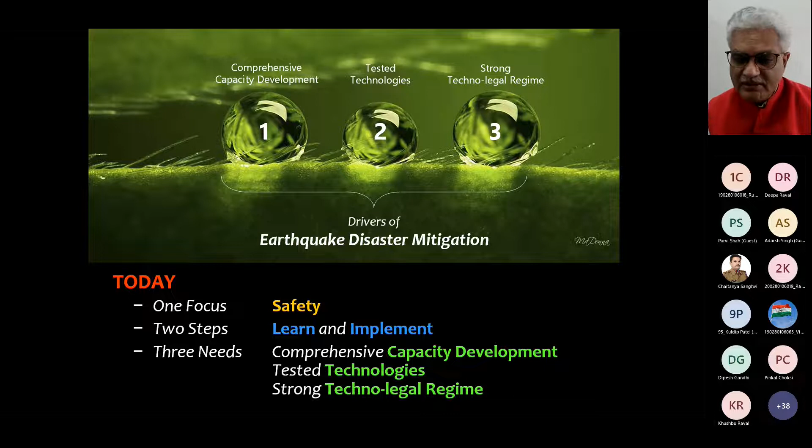And the most important activity as we look at it today is that of 10,000 municipalities, none of them are checking the safety of the structure when a design document is submitted to the municipal corporation. So on 3 counts, where we are using untested technologies, where the designs are not being examined by municipalities, and where engineers are not competent enough to handle the subject of earthquake engineering, we are looking at a backdrop of R&D, which is the basis of creating evidence-based implementation of earthquake resistant design practices.

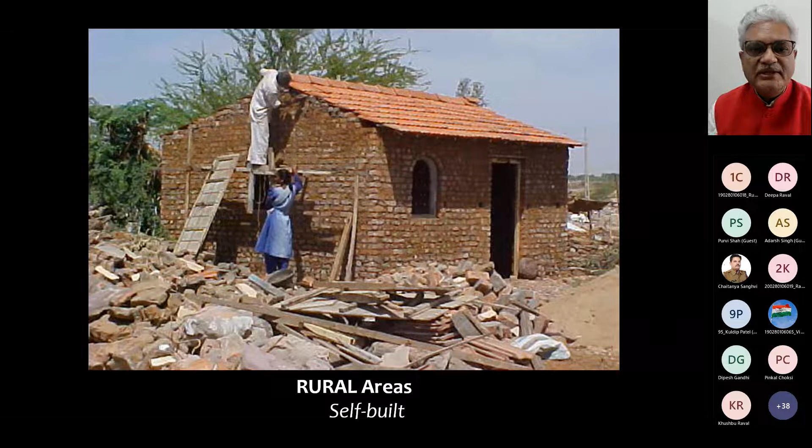We are looking at Gujarat's 2001 earthquake, where buildings collapsed and they're rebuilding again, this time also without earthquake resistant features. Like this, there are a large number of buildings that are cracked and standing across the country, which need urgent help for retrofit. We are looking at a good number of structures that are hybrid structures made of different materials, be it brick and reinforced concrete, or brick and wood, or stone and wood, and so on. So we need a formal program to study all these technologies. We also need to worry about the so-called engineered structures as well as the non-engineered structures. And there's much more gain or development we can achieve quickly if we can sort out the non-engineered construction.

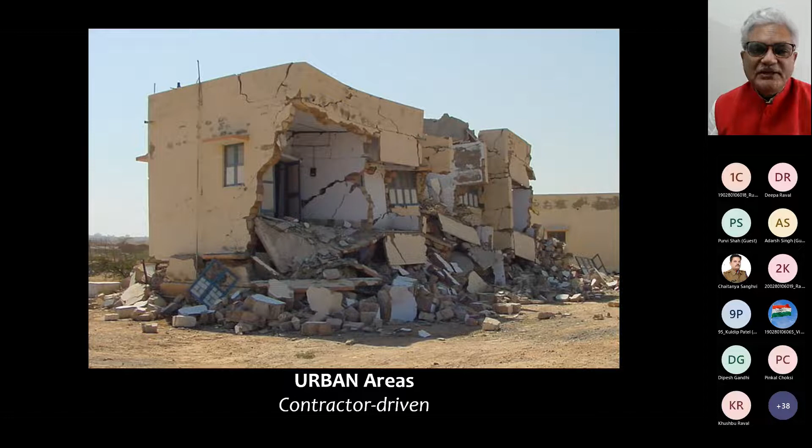So-called contractor-driven construction is making mistakes, which is becoming very obvious in the aftermath of earthquakes. So the type designs are a big crisis for us. It is easy for a government or a contractor to take a type design and reproduce 50,000 of them, or 10 lakhs of them, or 8,000 of them. But if there is a mistake in that, if that technology is not verified adequately, we will be embarrassed as we have been in the past.

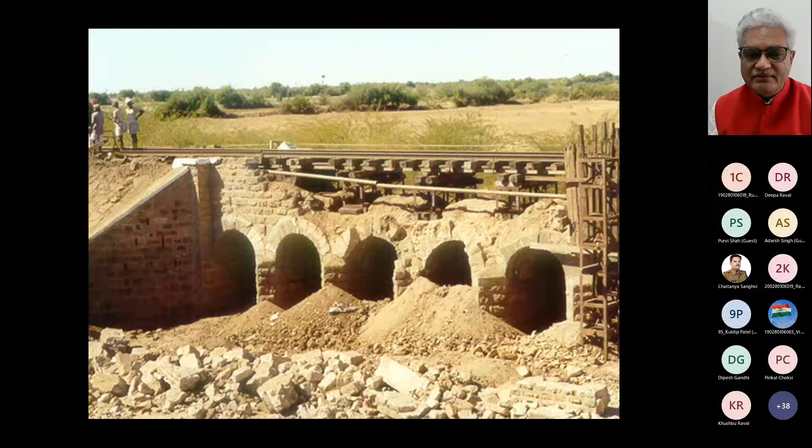If engineered buildings collapse at moderate shaking, we are in a position to say that we have not done enough to protect our own selves. Look at the spectrum of structures, bridges. Over 3 lakh bridges are sitting across the country, which are made of masonry structures, and they need urgent help. Large number of buildings and structures already built, but without earthquake resilient features are potential dangers for us in the next big earthquake that is likely to happen.

If one thought earthquake engineering was a civil engineering activity, even that is not true. And so virtually all engineers have to worry about earthquake shaking, be it electronics engineers, electrical engineers, mechanical engineers, and metallurgists, material science people. Everybody should now find agenda, and there is enough work for each of them to get worried about the next big earthquake.

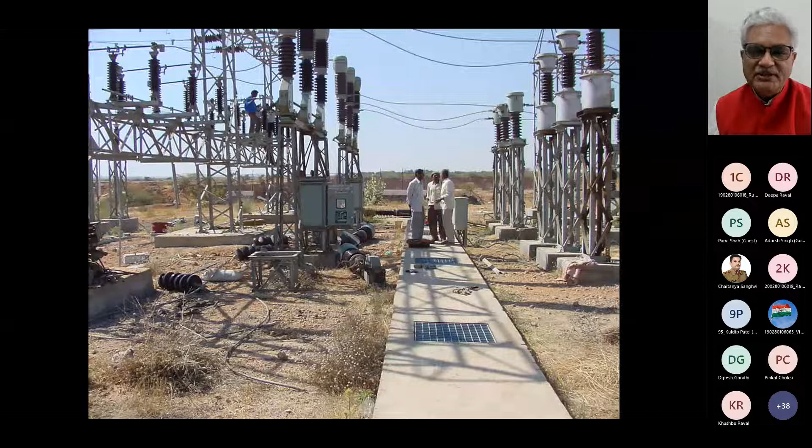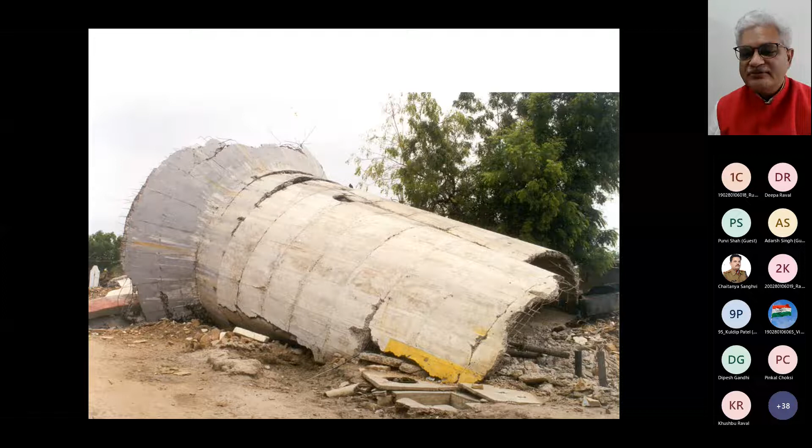Community structures have not received enough attention, especially water tanks. And we need to make sure that we don't have this practice of making cheap structures, but we develop a practice of making safe structures. Coastal structures, we don't have any standard for design of coastal structures to resist earthquakes. This is a double jeopardy problem because as such they are in water and there is clay and piles. In addition, if you add a shaking to that, then you're looking at possible liquefaction also to occur, even though it is in clay. There is a need to examine that.

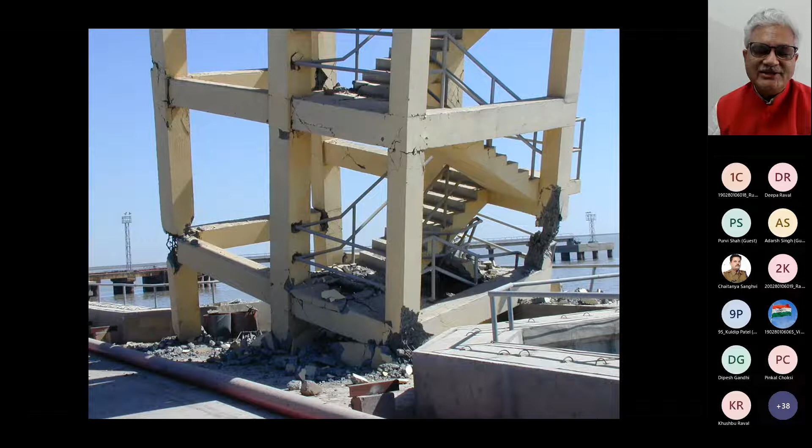Industrial structures come with their own complexities, and enough study is not being done to say that the designs that we are providing today are good for lateral actions. They may be good for vertical load carrying capacities, but not necessarily for lateral actions. It should become a practice in the nation that when you have irregular structures, the new engineers who are coming in from the colleges should be prohibited from designing such structures because the nuances are one too many and the complications are such that even an experienced engineer needs to spend significant amount of time, effort, and consultation before approving the design of such structures.

So in effect, how do we go about doing this entire work? When I look at disaster management per se, there are events, 3 of them before the disaster strikes and 3 of them after the disaster strikes. The most important, where we will get the maximum gains for the same effort, will be when we address the matters of mitigation and preparedness. Those of us who understand the 6 pillars, it's fine. For the rest of you, mitigation means building the hard structures to stand there without collapsing. So this is about the built environment. And preparedness is about the people, getting them ready to behave in a correct way when there is earthquake shaking.

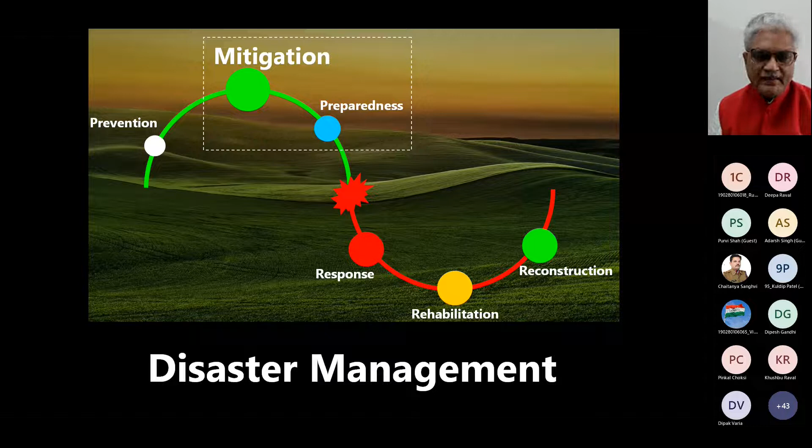You would agree that if we build all the structures to be safe from earthquake shaking, then you don't need response, you don't need rehabilitation and reconstruction. Post-earthquake response, you don't need. But if you don't do anything before the earthquake, which is mitigation and preparedness, then we will continue to have losses of lives and significant setback in property losses, and the nation will be pushed back, the states will be pushed back 30, 40 years every time there's an earthquake. This is something that we need to introspect deeply on.

So what is the method of going from where we are today to where we need to go, the target for us? There are two options. One is we're looking for ladders and we want to go up quickly. You want to do large work in half an hour and then reach there. The other one is go along the dangerous path for some time and then you'll soon see that life will get simpler and then you can walk ahead on a safe trajectory.

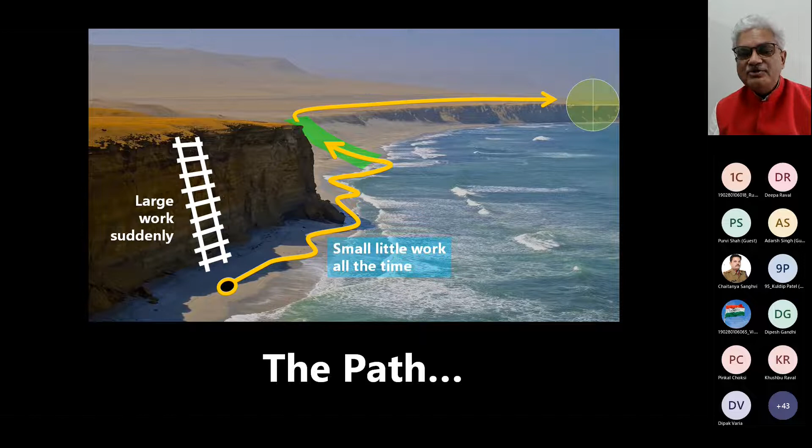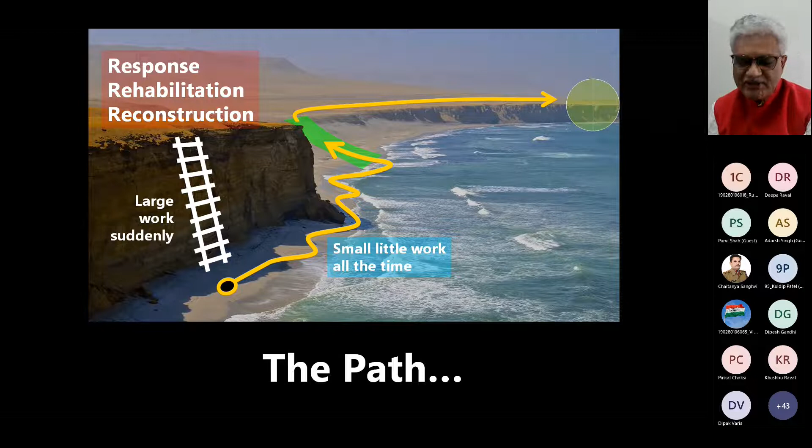So we need to do small little work every day, all the time. The first approach is the post-earthquake approach, which is response, rehabilitation, and reconstruction. And the second approach is mitigation and preparedness approach. Once mitigation is in place, preparedness has meaning. But if mitigation is not there, just doing preparedness will actually bring not much gains to the nation.

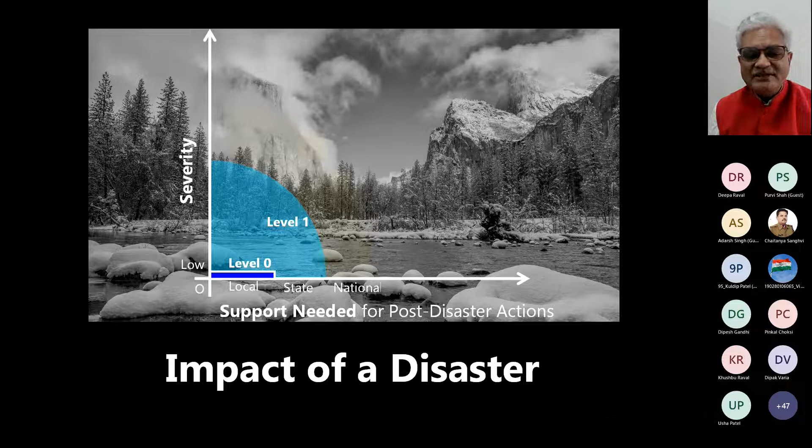When you look at disasters, there are small events which are local, can be handled without much pressure on us, but there are events that can spread over a state. Then there are events that spread over a nation, and then there are events that spread across the boundaries of the international borders. And hence, we need to see where is the potential source of earthquakes for us. Are we going to be incapacitated inside in a local town alone or in a state, nation, or international?

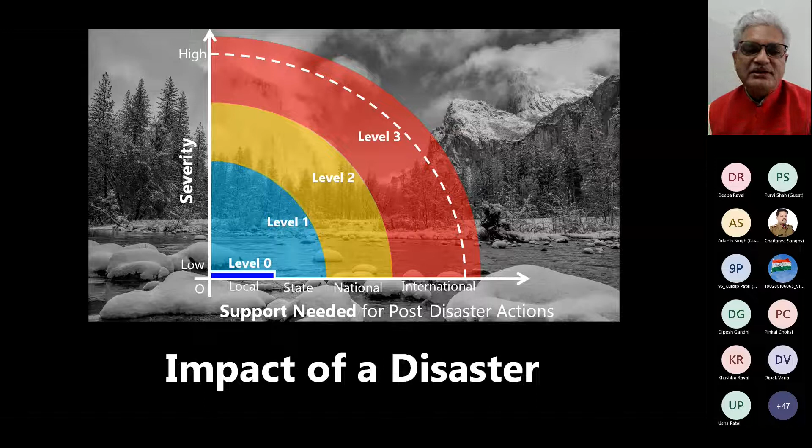It so happens that unlike other disasters, earthquakes do not happen in towns and cities. They happen in regions, and hence it can be within a state or across states or within a nation or even across international borders, as we have seen in the past earthquakes in India. So we need to prepare ourselves not for the small event alone, but for the largest event that is likely to happen in the country and bring together people of that region to become that much more capable. So we need a graded capability across the country to resist the issues of earthquake resistance.

So there are three things, three sets of activities or focus areas for us. First focus area is people, second focus area is property, and third focus area is performance. If your people know what to do, they can build the structures correctly, and if they design and build the structures correctly, they will perform correctly during the earthquakes. Now this is where the catch is, that even though we know the sequence 1, 2, 3, it is interesting that unless you bring all the people together, academia, industry, and government, and ensure that the property is protected, the rest of it is not going to bring us gains.

So once the property is protected, you will realize that it is possible that we can improve the understanding of the people, and we can also improve the performance of the structures in the next earthquake. And this loop is possible only when an organized R&D program is organized in the country, which brings together this tripod of academia, industry, and government to take responsibility of facing the next earthquake without any human losses.

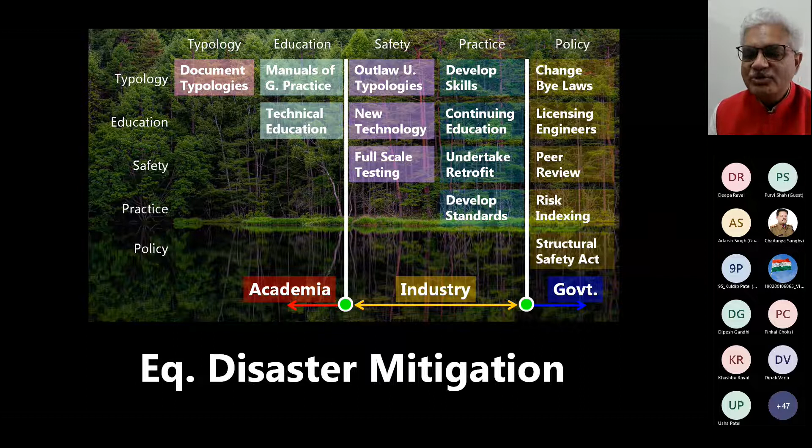So in every one of these boxes, there is a need for all the three to come together, academia, industry, and government, even though there is primary responsibility assigned to each of them. Only then we can say that we will have a competent nation capable of undertaking earthquake disaster mitigation.

Right? Now you might ask, in this picture, where is R&D? R&D is in every one of these boxes. It is not that R&D is a separate holy cow, which we will have to address independently. But if you're looking at technical education, unless the teacher knows 100, he or she cannot teach 10.

Unless the rigorous analyses are done and the unsafe typologies are demonstrated, we cannot remove the unsafe typologies from practice just by word of mouth. We have to demonstrate their poor performance, and we just can't wait for the next earthquake. If we have it from the previous earthquake, it is wonderful. If not, we have to do detailed experimental as well as analytical work to show that we need to remove those unsafe typologies.

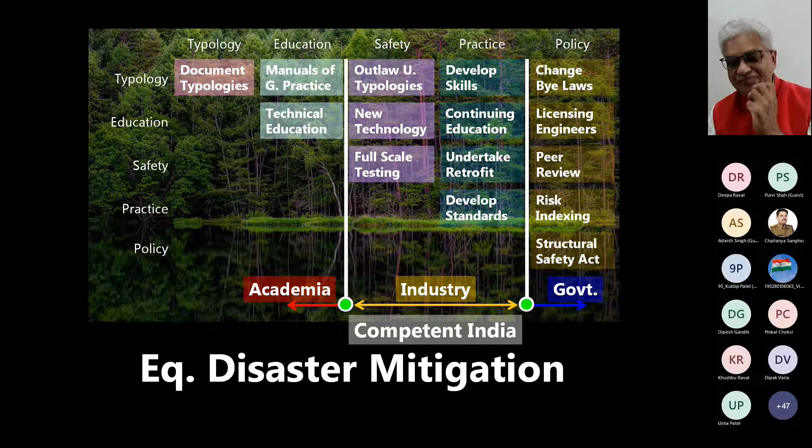Very clearly, so what is the roadmap for built environment? R&D tells us that first of all, the construction should be minimal. If you don't want something, don't use that, don't make that. So don't make unduly large buildings and tall buildings and wide buildings with a large number of fixtures, with heavy masses and so on. So you need to use minimal resources and make a structure.

First. Second, you need to use natural materials to the extent possible to make a structure. Third, you need to understand disaster resistance and build those disaster resilient features in the constructions. And fourth, you have to respect nature. The solution is not always to defy nature; very clearly in some cases you need to comply with nature. And this is where the displacement design and the force design come into picture.

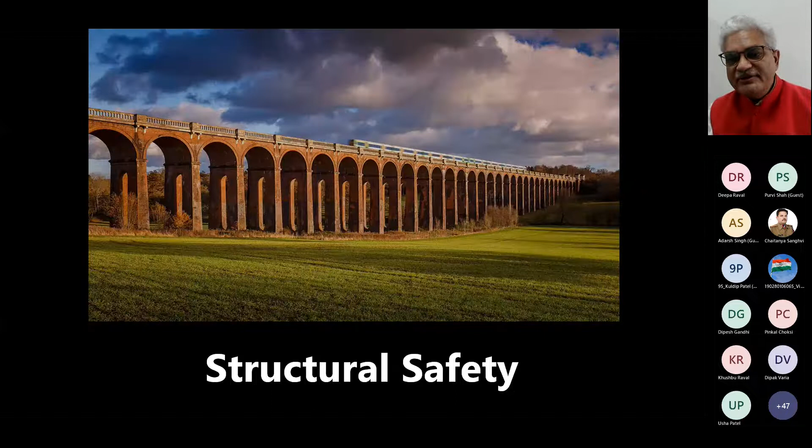Structural safety, on the other hand, if you look at it, has 5 major expectations: safety, serviceability, durability, aesthetics, and economy. These are the 5 tenets of every built environment. And out of these, in the driving seat should be safety. On the top of the list should be safety. Once safety is in place, then we will assess serviceability, durability, aesthetics, and economy.

Furthermore, the first 3 are fixed in that order. First of all, it has to be safe. Second, it has to serve the needs, the functionalities that we have. And third, it has to be durable. Only when it is serviceable can we talk of durability. Otherwise, we do not talk of durability without it being serviceable.

Also, the last 2 items, aesthetics and economy, are something that we will have to keep in mind. Every engineering solution should be an economic solution. So unduly increasing cost of structures just because we get a percentage of it is not the method of life for any designer who is building these structures, right?

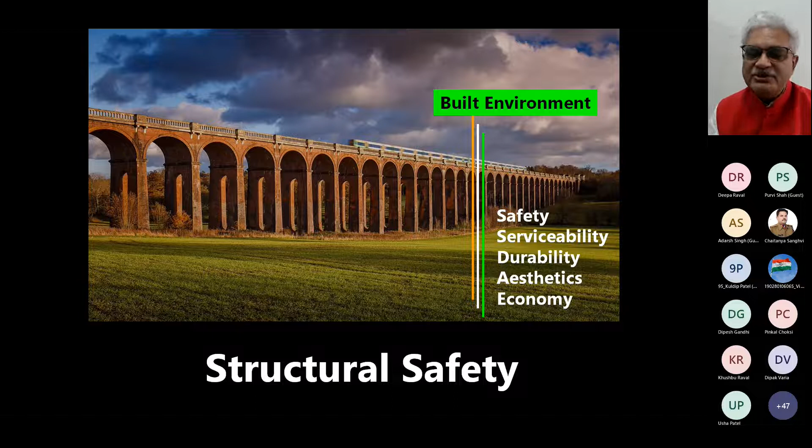Aesthetics: if you want to make the building more aesthetic, you may have to spend a little more money. Or if you don't have that much money, you can push aesthetics down and bring economy up on the priority list. Otherwise, the first 3 positions are fixed and we need to comply with that.

Wisdom tells us that on earthquake disaster mitigation in the R&D side, we have made many mistakes and we don't want to make those mistakes now. So what are the mistakes that we made in the past? First of all, we don't have trained manpower. So the first requirement of R&D is that we have trained manpower.

Qualified manpower is not sufficient. We need competent manpower. Competence is knowledge plus skill plus positive attitude. Only then we call that as competent person. And so we need competent manpower.

Second, we are undertaking land use indiscriminately. For example, if there are low-lying areas, we go ahead and construct structures in that. And when earthquake comes, because of the water table being very high in those low-lying areas, liquefaction happens and the structures get into trouble. Or if you're on the hill slopes, which are unstable hill slopes, rolling debris will come and hit the buildings. And then we are saying, no, this is unsafe.

So we need to worry about land use the way we have been using land. And sometimes in hilly areas, we are overloading the slopes, and settlements are now becoming very obvious in 60 years' time that it was not a good practice to overload the slopes.

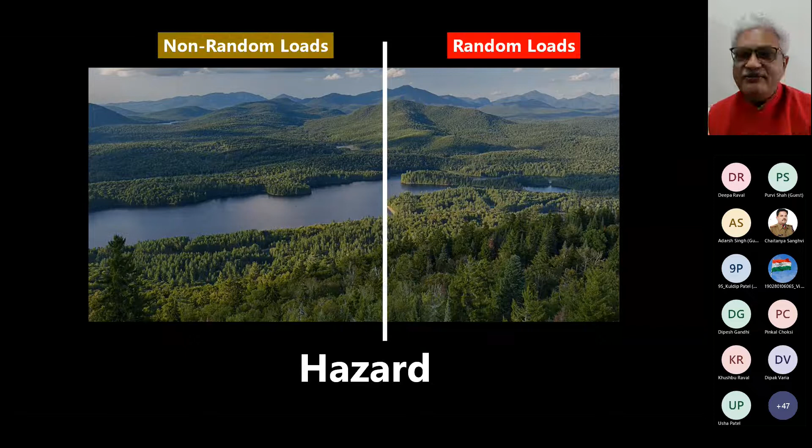Talking about hazard, as I mentioned before, we have looked at all our 16 load actions that we have. And when you classify them, you have the non-random loads and the random loads classified into force loads and displacement loads. The force loads are relatively well understood, but the displacement loads, which are earthquake loading as well as foundation settlement, elastic shortening, temperature, creep and shrinkage, are not well understood. They are not taught in the classes also. And this is where the worry is, that we send out people with force load design capabilities and they have to implement displacement loading design at the practice level.

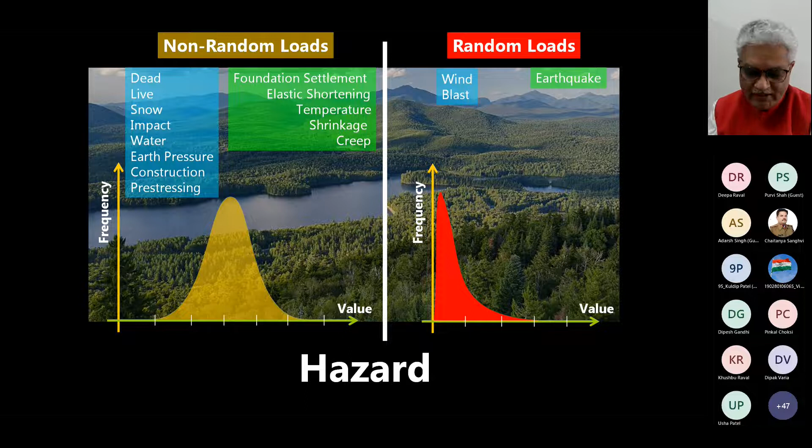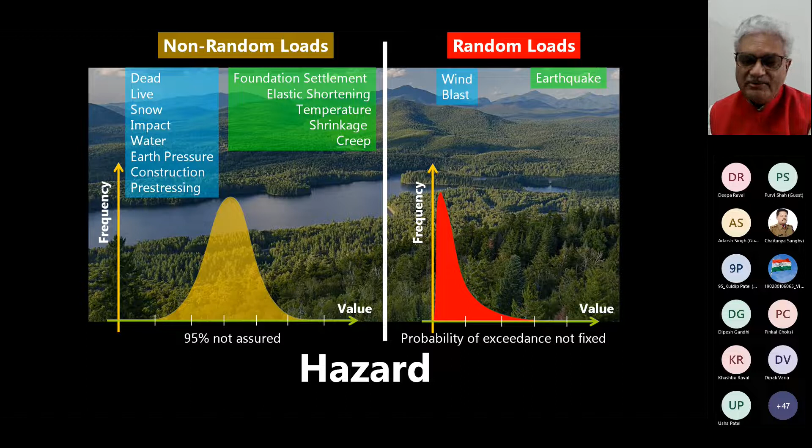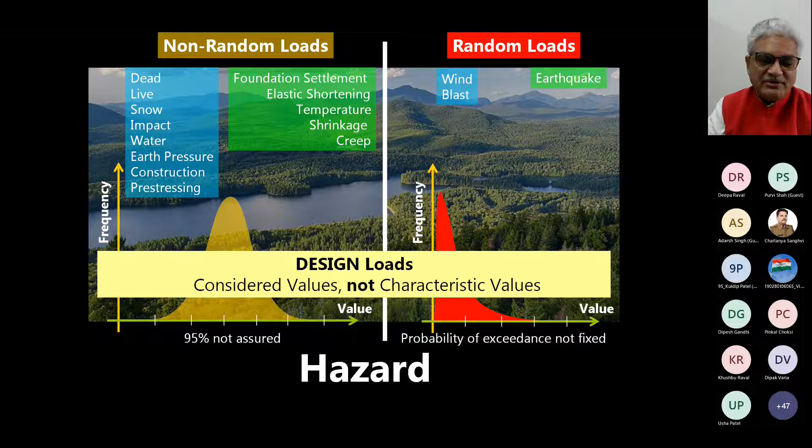Another important point is that when you look at force loads, there is a sense of characteristic load where in 95% of the cases, the load is less than that characteristic value. And that's not the story in the case of earthquakes. They are relatively infrequent activities. So we need to play around with the probabilities of exceedance. So unlike in the case of the commonly known loads, where the design loads are characteristic values, in case of earthquakes, the design loads are not characteristic values, they are considered values, which means that it is becoming subjective here.

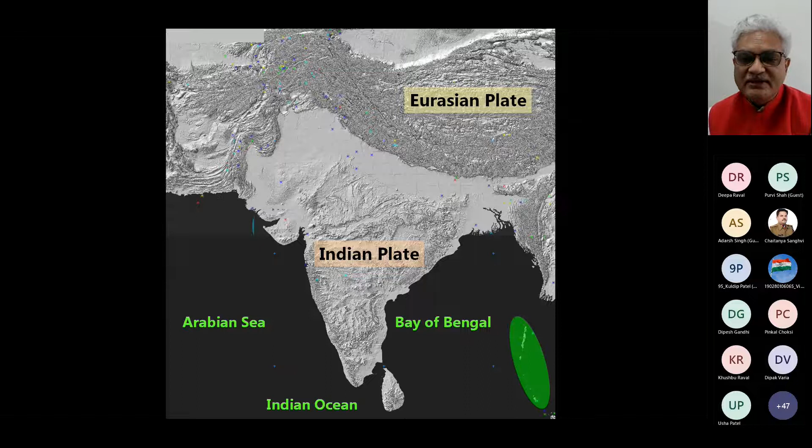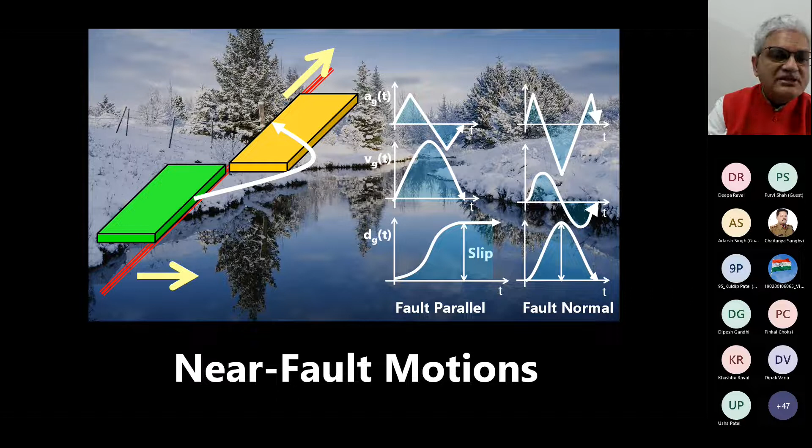When you look at the Indian subcontinent carefully, you will notice that there is a very special situation that we are faced with, which is the Himalayas. The faults are along the Himalayas, and there is a near field action that is causing the faults to provide large velocities and large displacements in the ground motion, which are residual displacements. And this is not reflected in the current design practice in the country. So there is a need for understanding fault normal and fault parallel motions, which will eventually tell us what will be the design approach to face large movements in the proximity of faults in the country.

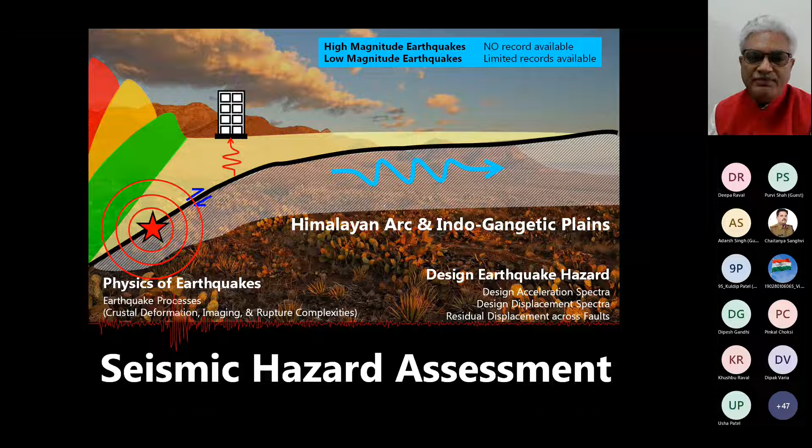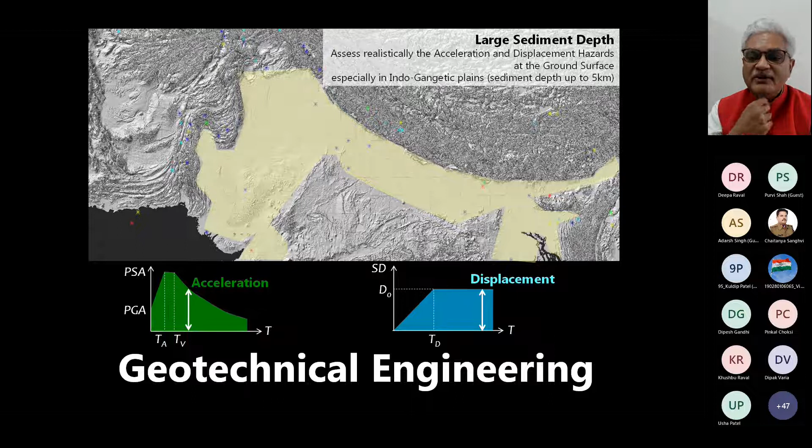Seismic hazard assessment has yet another dimension for India, which is peculiar to this nation and not to other nations. When you look at the northern region here, we have the Indo-Gangetic Plains, which is largely the ocean bottom sand that has come up due to the plate collision. When the Indian plate collided with Eurasia, that is the ocean bottom material that has come up. And this ocean bottom material changes the response of the ground depending on where exactly you are located with respect to the fault lines.

There are deeper sections near Gorakhpur, which will be about 5-6 kilometers thick. And there'll be sections near Lucknow, which will be about 4 kilometers thick. And then there are places in between like Kanpur and eventually Jabalpur, where you're looking at the sediment thickness varying from 5 kilometers to 0 kilometers. Different structures respond to different natural frequencies in a different way.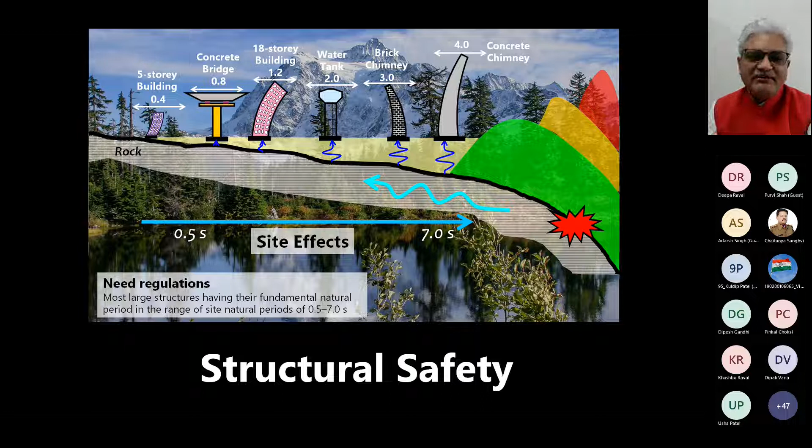And hence, we are looking at understanding the site period carefully so that such structures whose natural periods come close to the site periods need to be designed in a different way altogether. And so we need regulations here, but for those regulations, we need to have enough R&D undertaken so that it will go forward safely from where we stand today.

The concept of multi-hazard has been in use all these days. I must say that just as in design, when you design a structure, you first design it for strength and then check for serviceability and robustness and integrity. In the same way, you need to look at your primary hazard that is prevalent at a site. Let us say there is a location where earthquake is the primary hazard in the country. Then you need to design for dead load, live load, and earthquake to begin with, and then check for all the other hazards and all the other levels of performance that you're expecting.

So it is not that this is something new that we are doing today. This has been in practice all these years. It is just that somebody managed to put an exciting word into the government's eyes and they called it multi-hazard. Every design is actually supposed to be multi-hazard. There is no design that is not multi-hazard. And so we have to be very careful with buzzwords that are going around in the market. Don't fall prey to this multi-hazard story because this is not a new story. We have been doing this all along.

Disaster resistant design, as I said, when you look at multiple hazards, there is defiant design if you look at force loading, and there is compliant design if you are looking at displacement loading. And this is where we stand today, that always larger sizes, thicker members, bigger structures are not going to win you safety, because larger structures, bigger sizes, thicker members will give you more mass, and that will mean more earthquake forces, which means there is a need for higher earthquake resistance. And especially if your material is weak like masonry, they will not survive.

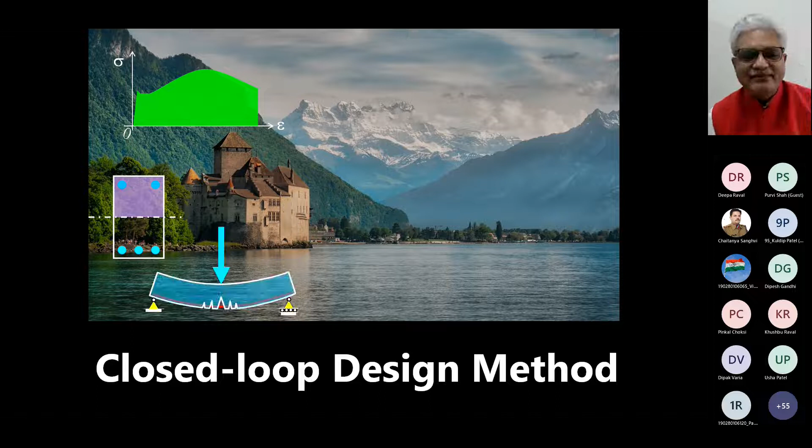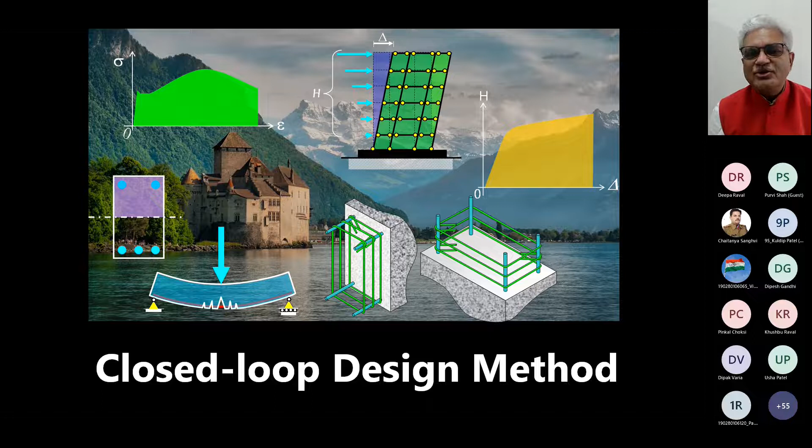So this is the first time that you will realize that if you know the materials and you design the sections and then detail the members and go ahead and construct, it is not sufficient. You need to also understand the behavior of the structure that you have designed, and only then you should sign on the drawings. So just the forward loop is not sufficient. You need to close the loop and make sure you always follow a closed loop design method.

Currently, Indian practice is not doing the closed loop design method, and we need to go towards a closed loop design method, which means a good amount of R&D needs to be done by the technical people of India, by a large number of competent technical people of India, a graded population of all ages. That is what I'm looking at. When I say graded, I need people who are young, who are middle-aged, and who are old-aged. All ages, we need R&D as a sensibility, R&D as an excitement, R&D as a responsibility to make ourselves safe from the next earthquake.

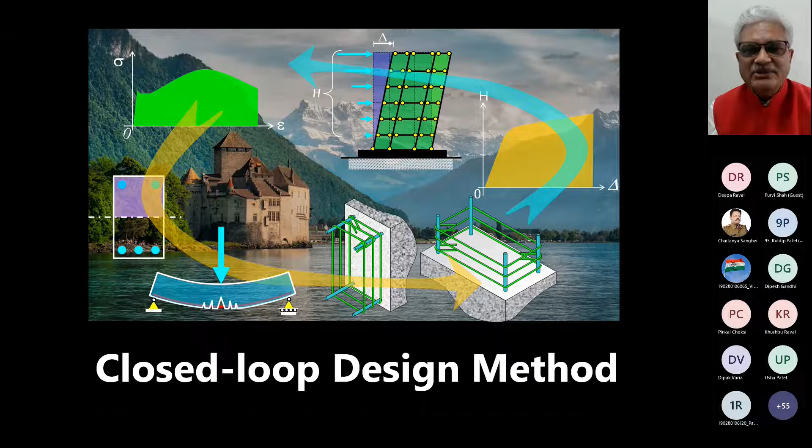So to be wanting to do R&D, you will recognize that R&D can be done on any of the 7 virtues of earthquake-resistant construction. The first one is configuration. You can interact with architects and come up with a detailed structural analysis on the effect of form on safety as far as the architectural practice is concerned. So that's the first one. Second one is how stiff should the structure be in its initial undamaged state. Third is what strengths you should ensure in these structures.

Fourth is what should be the ductility that we can have in these structures? Indeed, what is the ductility that can be achieved in these structures? Fifth is what is the deformability of these structures? How much will they shake back and forth without collapsing? That deformation is important because earthquake is only applying deformation. So ultimately, if your structure has to stand, your deformation capacity has to be more than deformation demand from the earthquakes. And sixth is that there is a collapse mechanism.

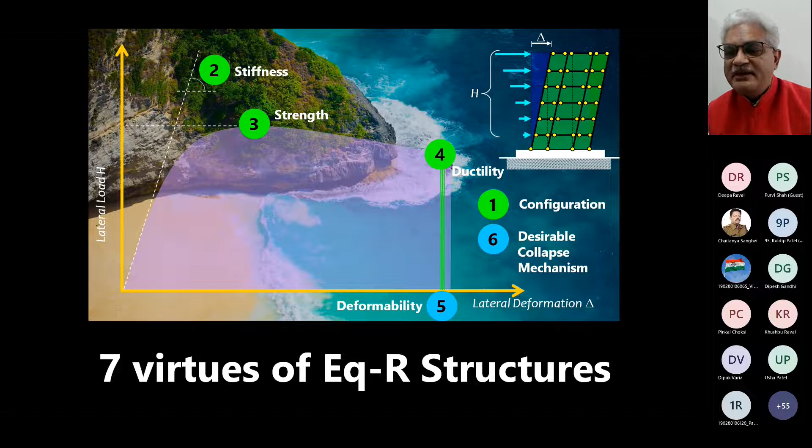The one that you see on the top here is the desirable collapse mechanism, let's say for buildings where only beam ends will form plastic hinges and all the beam ends will form plastic hinges. In the current design practice, all the beams are not forming plastic hinges; only in the bottom third or bottom half the plastic hinges are forming, and the top half is just sitting joblessly doing nothing for the nation. And so we have to make sure that the plastic hinges form throughout the height, and then only we say that we are able to make sure that all the citizens of India are participating in the safety. Like that, all the members of the building are participating in earthquake resistance.

And the 7th item is to see how much energy the earthquake is feeding and how much energy can the structure absorb. So 7 levels of R&D can be done as of today, and we are at the starting blocks. That's the good news as well as the bad news. The bad news is because we haven't done much, but the good news is we can do so much from today.

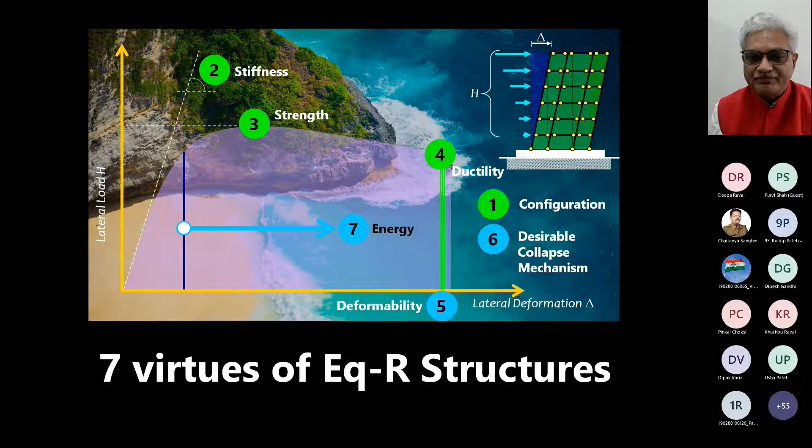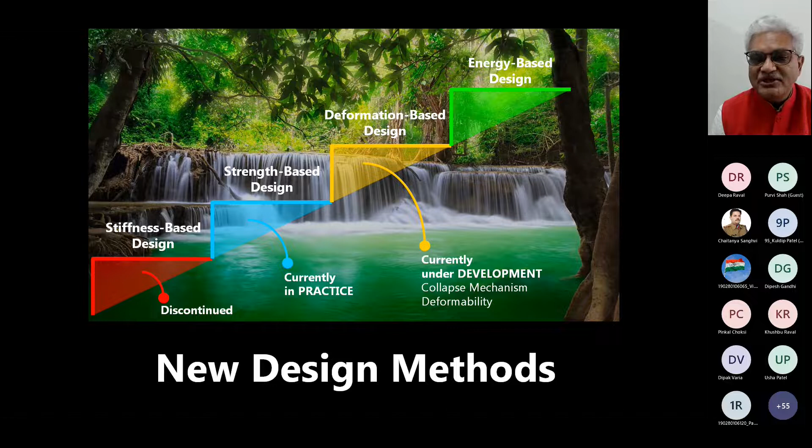So when you look at design methods, if you have seen past design methods, stiffness-based design was what was done in the yesteryears, masonry structures, but that was discontinued, and we got into strength-based design. And that strength-based design is the current practice now, but significant effort is underway on deformation-based design, and this will become eventually the norm for new constructions. And I'm hoping that many of us in India will learn this subject. And eventually, we also have to walk towards energy-based design. Research is just beginning in energy-based design, and we need to focus on collapse mechanisms, deformability, and energy absorption to ensure safety of the people of India.

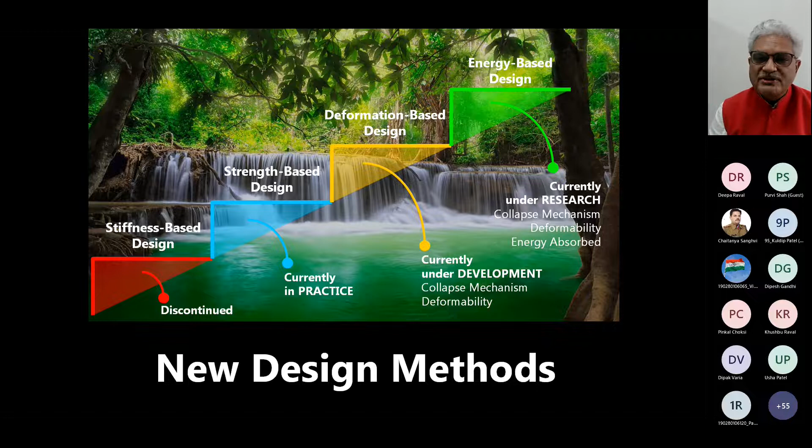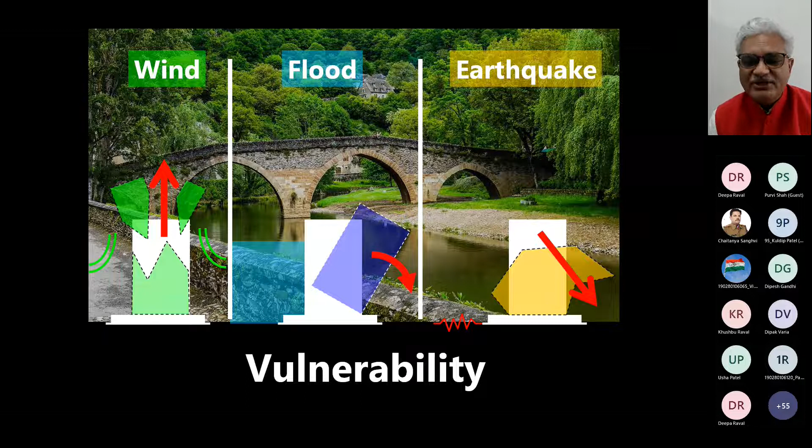When you look at vulnerability of the structures under the three dominant natural effects on structures, you're looking at wind, which generally carries the structure away in the upward direction, right? Everything flies in wind. Under flood action, everything topples, and under earthquake action, everything collapses. And these are the three actions that we'll have to design for. Interestingly, if things are flying away upwards, the recommendation is you should have large mass and good anchorage. Interestingly, for flood, to prevent it from toppling, the recommendation is large mass and a wide base so that it can be restricted from toppling.

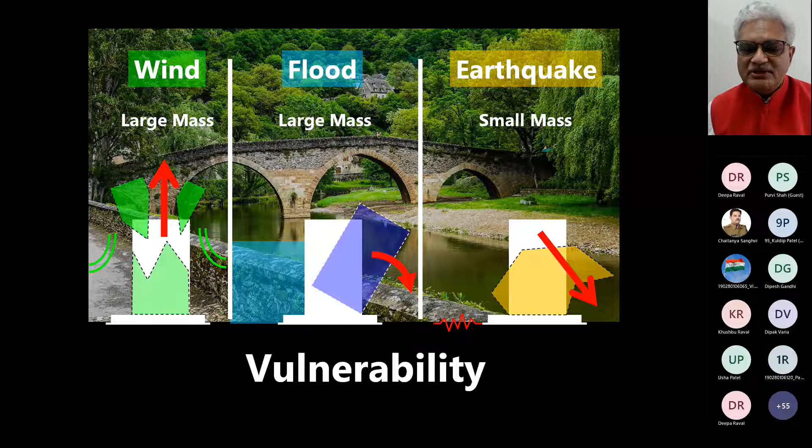And interestingly, earthquake requires small mass, right? So now if you're doing multi-hazard design, tell me what should be the mass of the structure. And this is the subject of R&D. If earthquake says small mass and all other fellows are saying large mass, earthquake is not wrong, neither are the others wrong. Now it is for you to make things right as to what should be the mass of the structure to design it to resist earthquake effects.

Indian standards today, only a limited number of them are on earthquake safety, about 10 of them out of the 2000 standards that we have for buildings, and 400 of them are related to safety. Only about 10 of them are related to earthquake resistance, right? And we know those numbers also. Some are related to hazard, some are design, and some are assessment and retrofit. But these are the early provisions, and we need to make a comprehensive upgrade of this.

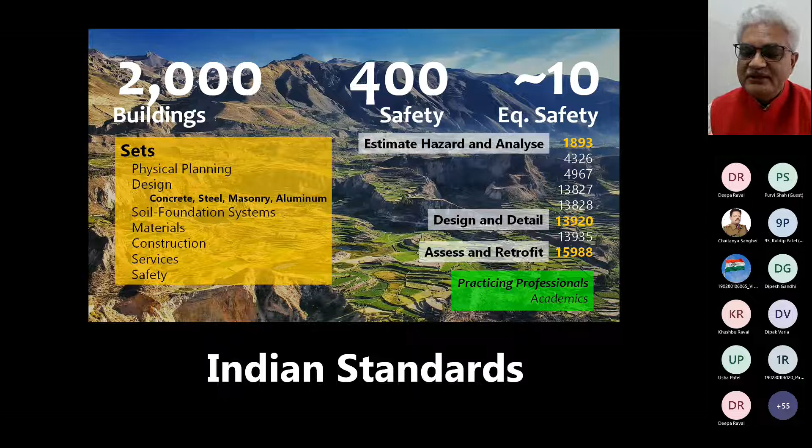And this is where we need a lot more participation of people who are doing R&D, because clauses can go in and can make India safe only if they're adequately researched and rehearsed in the laboratories and tested before they are practiced, right? So in particular, the role of practicing engineers to become truly professionals, in terms of trying to guide the R&D efforts, is what we are expecting in time ahead.

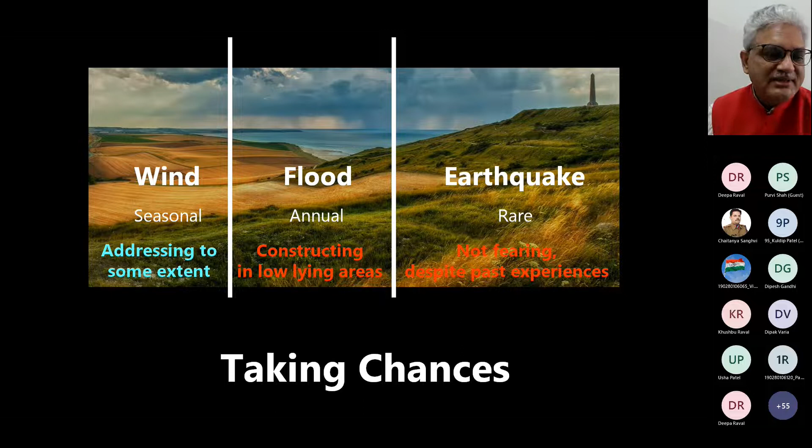Right. Once again, back to our three dominant natural effects. Wind is seasonal, flood is annual, earthquake is rare. So what are we doing? Wind, we are doing something because it's our regular headache. So we are addressing it to some extent. Flood, interesting. We are constructing in lower lying areas.

That means we are absolutely foolish in trying to use land wherever it is available and then cry loud saying that, oh, it has flooded, and now disaster management and so on. Absolutely ridiculous, lack of common sense practice. We need to discontinue this immediately.

You have to stay well above high flood level if you really want to be safe in the next flood, which all means that you need a good public transportation system. People need not all live on the edge of the waters. Some of them can be inside, and they can be provided water from where we have.

But what is embarrassing is that we are not fearing anything as far as earthquakes are concerned. And despite past experiences, we are still playing dangerous with no education, no professional competence, and no checking of the designs in the country, right?

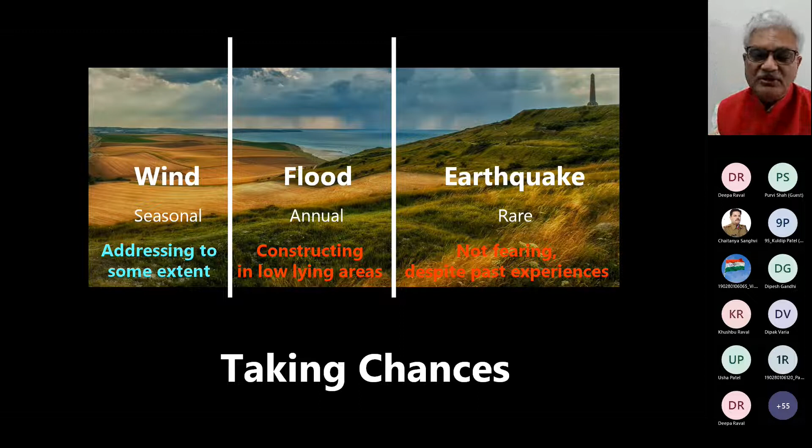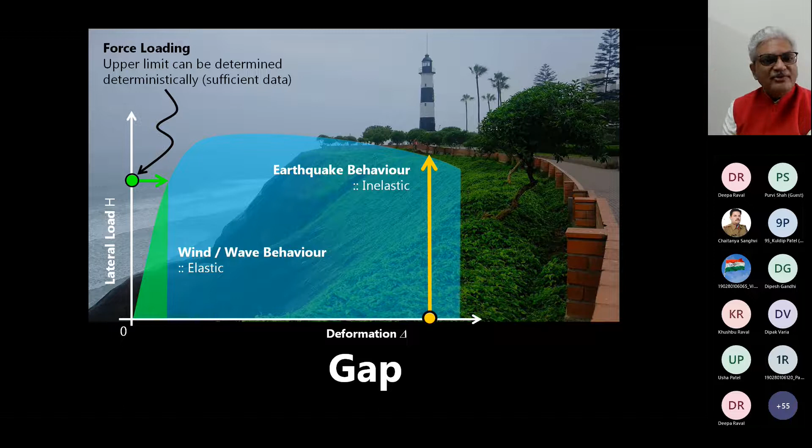Also, a main gap area that we're looking at is nonlinear behavior of structures. And today, nonlinear behavior is not taught in the country as part of the mandatory curriculum in any of the master's or PhD programs. That is where we don't have teachers to teach them. And so graduates will not know.

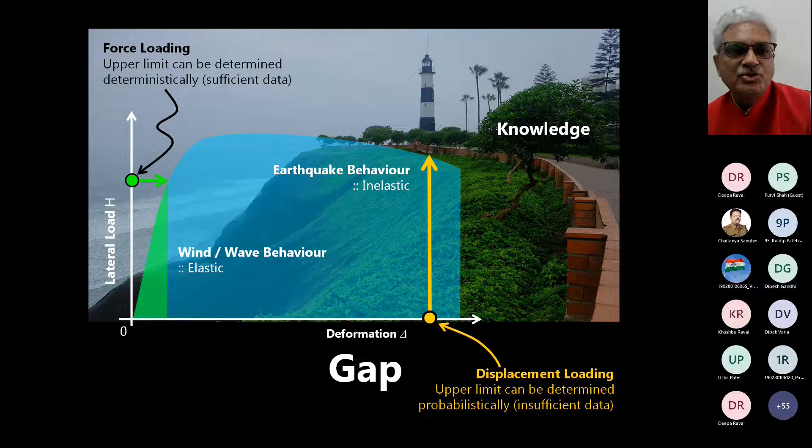They'll continue to press buttons on computer software that's available in the market and draw graphs, which mean nothing to them, and they can interpret it any way they want. So this is an embarrassing moment again. R&D has to grow in this direction.

When you look at exposure, we talked about hazard, we talked about vulnerability, and now we're talking about exposure. Exposure is from different points of view: people, property, downtime of various services and activities, and business. So we're talking about human exposure, property exposure, financial exposure, and business exposure. All of these, hazard, vulnerability, and exposure, together need to be contained, and bylaws will play an important role in this.

Together, hazard, vulnerability, and exposure is called risk, and hazard largely is understood through earthquake science, vulnerability through earthquake structural engineering and geotechnical engineering, and then exposure through bylaws. And if you can contain all of these within safe limits, you will walk towards ensuring structural safety in the country. As of today, we have very high risk under the likely probable loads.

We are getting a large amount of unacceptable and intolerable levels of damage in structures, as was seen in the 2001 Gujarat earthquake. We need to reduce that and increase the possibility of acceptable and tolerable damage in structures under improbable and possible loads. This is where the game is, and I'm hoping that we will spend enough attention in the decade ahead on assessing risk in the country.

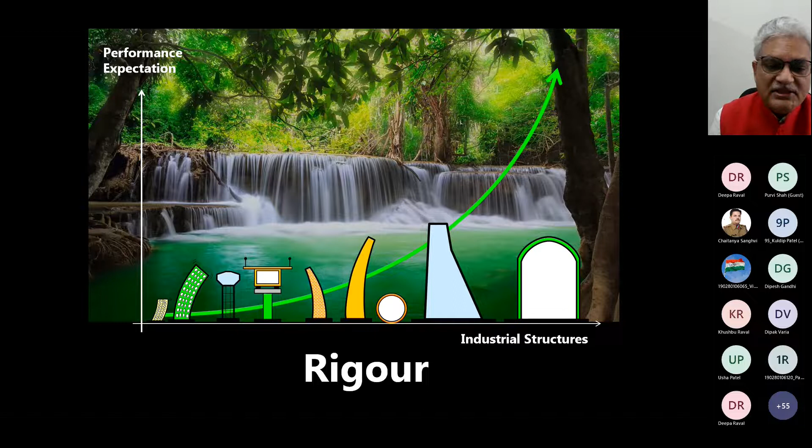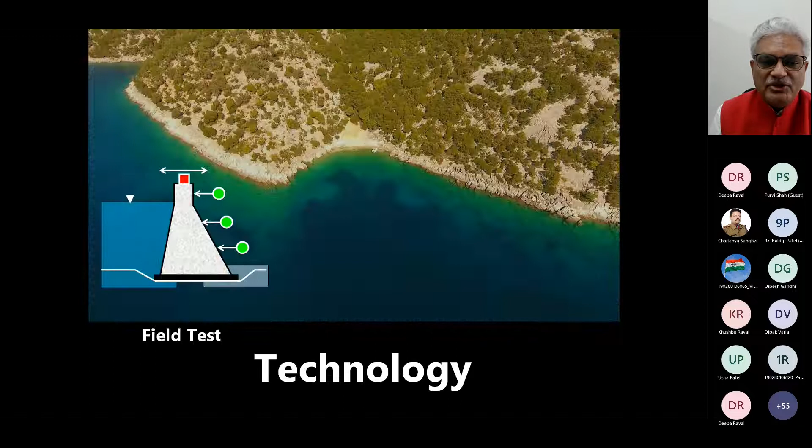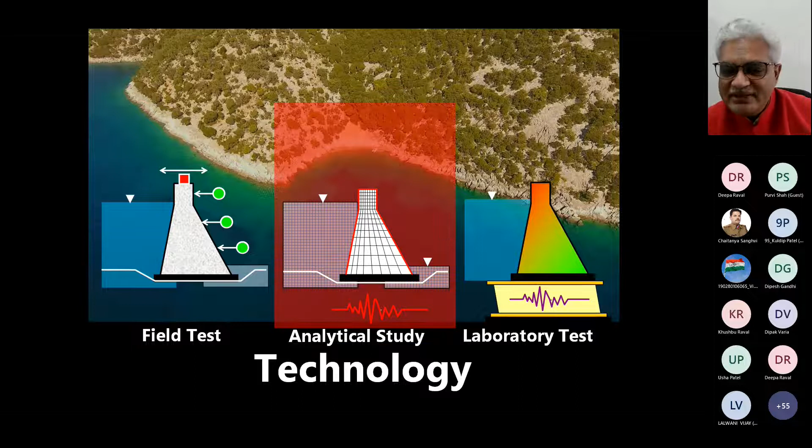Right? Talking of technology, we have about 5,000 such dams in the country, but when you look at the dam safety assessment, 3 activities are required: field tests, analytical studies, and laboratory studies. Very clearly, there are no field tests done and no laboratory tests done. Only 1 or 2 individuals are doing some analytical work in the country to protect 5,000 dams.

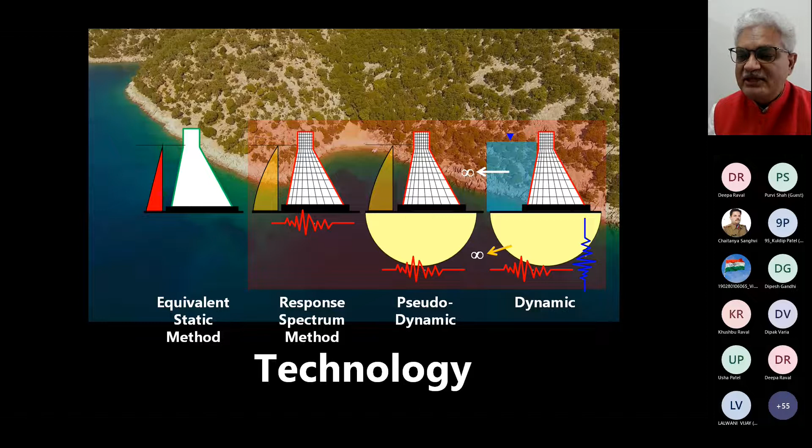And even in analytical work, the people who are doing such work are only doing the 1960s equivalent static analysis, and maybe in a limited case, they're doing finite element analysis, but linear behavior. And hence, we are in great need of a large number of hands which can handle the subject of safety assessment of the dams, especially the 5,500 specified dams in the country.

As I said, today we have over 32 crore buildings and an equally large number of other structures in the country. We are looking at making sure that all the new constructions are made safe in time ahead by improved education, improved research and development, and improved professional practice and peer review verification. That is the only multi-pronged approach that can take us to make structures safe.

But how about all those structures that exist right now? If you have to bring them into the realm of safety, then you need to retrofit them. And so the number of unsafe structures have to be reduced over time. And we are praying that we will be able to do that quickly. If we don't, then the earthquake will win the competition and we will be embarrassed once more.

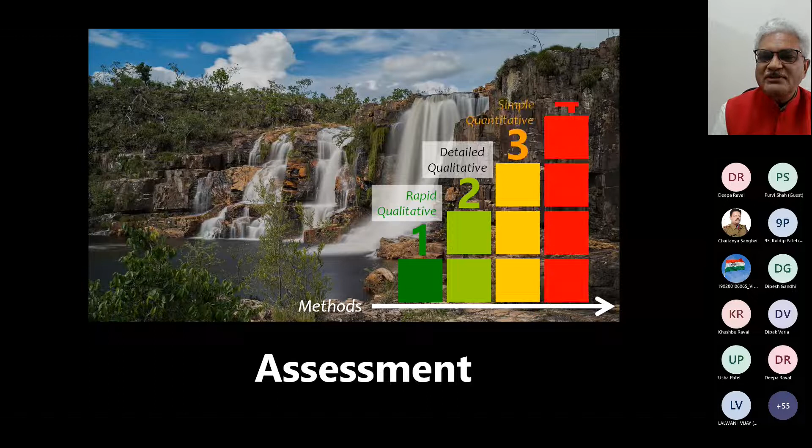So we need technologies for retrofitting and different technologies for different structures: critical structures, lifeline structures, schools, and select houses and buildings, which are required, especially after the earthquakes. Earthquake safety assessment of structures today has to be understood in the context of 4 levels of assessment. The first 2 levels are called the qualitative assessments, and the second 2 levels are called quantitative assessments.

Anybody who has done qualitative assessment and said that the structure is safe or unsafe should not be believed. Only when they do quantitative assessment is when the game begins, and that is where we are looking for more attention and effort in R&D, where we will require to spend the time on details and bring about clear statements on how to ensure safety of the structures, right?

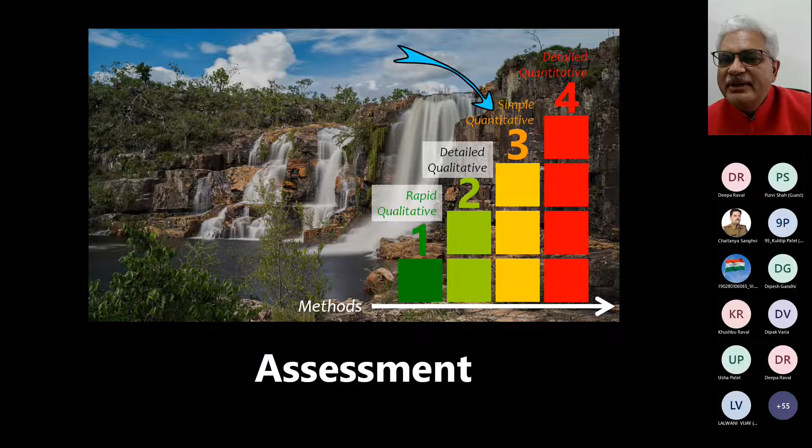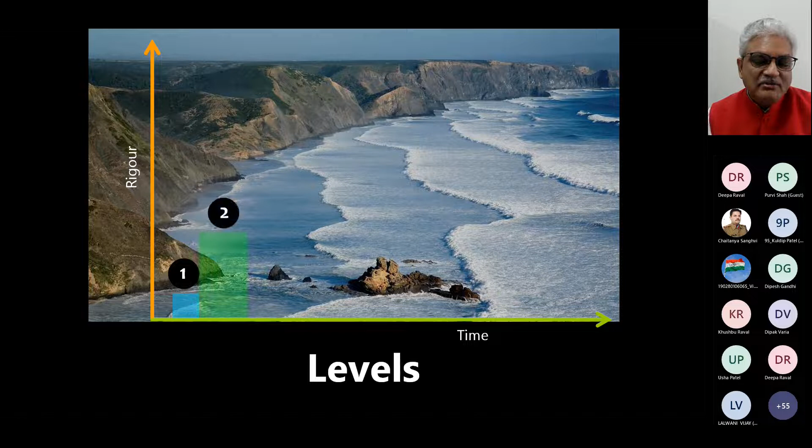I suggest that we could begin with level 3, which is simple quantitative assessment of all structures that I showed you so far. So when you look at the 4 levels of assessment, the first one takes less rigor and less time. Second one, more rigor and little more time. Third one, even more rigorous and much more time. And then, of course, level 4 is deep details and large amount of time.

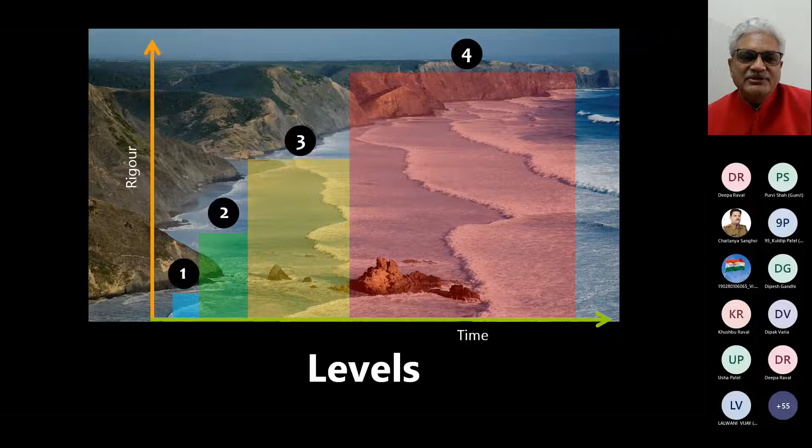If you can do 1,000 buildings, you can do 100 buildings in the same time with the same people. You can do only 10 buildings of level 3 in the same time with the same people, and only 1 building in the same time with this full rigor. What we are saying is that when you take stock of 30 crores of buildings that exist, of which 25 crores are sitting in seismic zones 3, 4, and 5, if you want to assess them, you can't do level 3 assessment for all of them.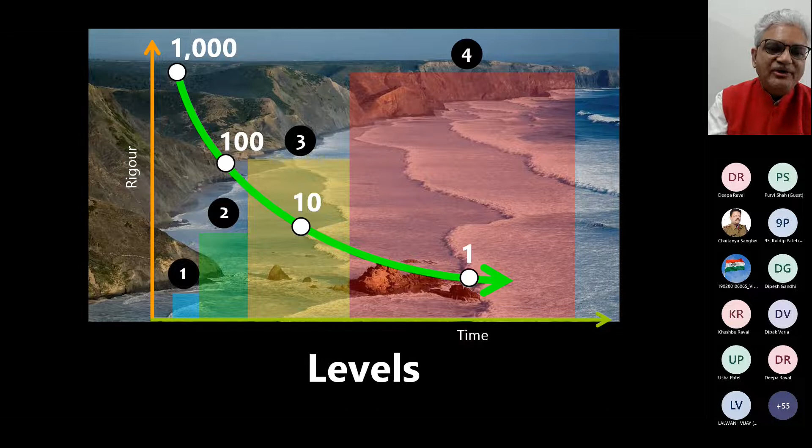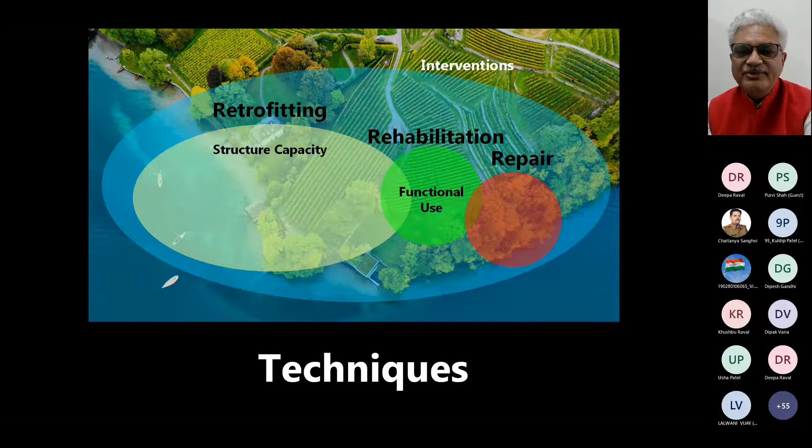So the importance of level 1 and level 2 is to simply filter out or prioritize structures so that we can do level 3 and level 4 only for the important and high risk structures that we have. There are a number of techniques for retrofitting, but in the market, there are a good number of people who are selling repair as retrofit, and that is where I would like to caution you: don't get unduly carried away by repair as retrofit.

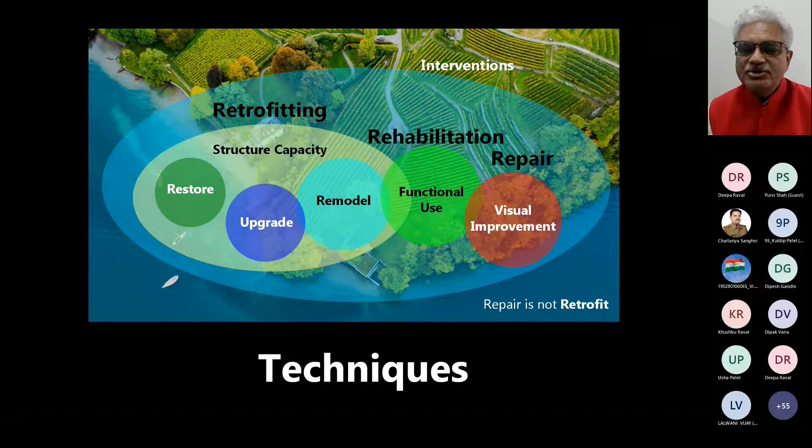Please make sure that you are able to clearly appreciate the difference between repair and retrofit, and don't just use the word repair loosely when it comes to earthquake safety. In fact, I would never think that there is a word called repair in earthquake safety, because there's always retrofit. That is the one that talks about structural safety, that talks about all the 7 virtues that we just showed you a moment ago. So retrofit is a very clearly set out procedure, and you need to undertake that in a rigorous way, in an organized way. Only then we can say that we are on the roadmap for making existing structures safe.

Now, this is where there is opportunity for the new generation. We have created a large stock of unsafe structures, and they can do professional work of good quality and come up with good R&D to be able to answer this question of how to retrofit existing structures. Right. So the bottom line for us is new structures should be peer reviewed, technologies with R&D backing should be used henceforth, and type designs should be used only if they are fully tested. As far as existing structures are concerned, we need to do assessment.

So nonlinear analysis has to be learned, and academia has to learn it first and then teach it to the others. And then strengthening has to be understood in terms of experimental work, and retrofit measures have to be quantified. And finally, all this needs to be demonstrated in pilot projects.

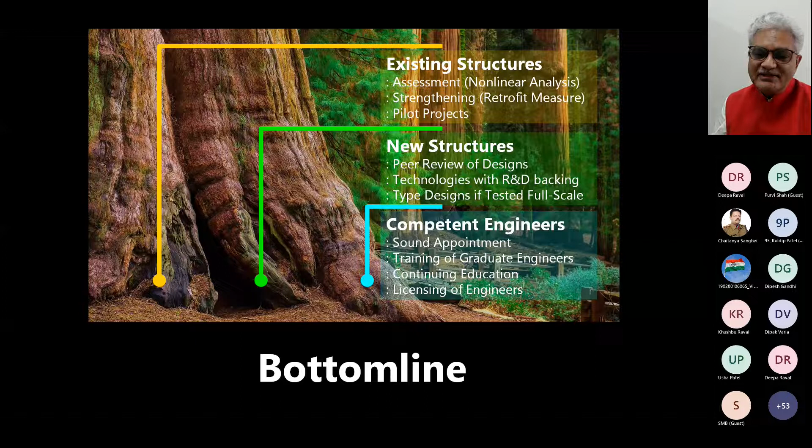Competent engineers alone can make the top 2 activities happen successfully. So you need to make sound appointments without fear or favor. You need to train graduate engineers who are practicing, and so continuing education will have to come in, and licensing of engineers, because subject knowledge keeps growing. People have to update themselves. If they don't update themselves, they don't have the license renewed, and so they fall by the wayside.

This is essential for a nation which is trying to move its masses from the villages to the urban area. The rural-urban 30-70 is going to become 70-30, 70 in the urban area and 30 in the rural area. We are going to have a lot of work. All our urban areas will go up by 2.3 times the size that they are today, and we require all the structures to be built in 200% numbers than what exists today.

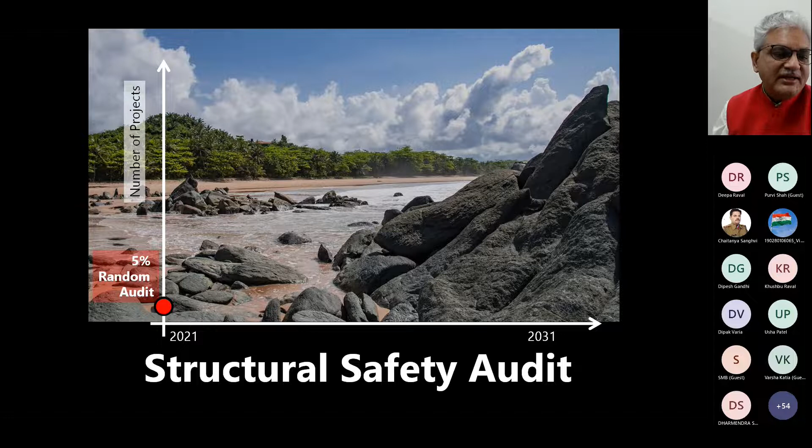...need them not just to be degree holders; they need them to pass the examination and license themselves, and they should also renew their licenses every 3 years. So today, as we are speaking, we have a large number of projects underway and we are not doing any audit. So if we start auditing 5% of them today, in the next decade we might be able to get this up to 100%, only if we are consciously building...

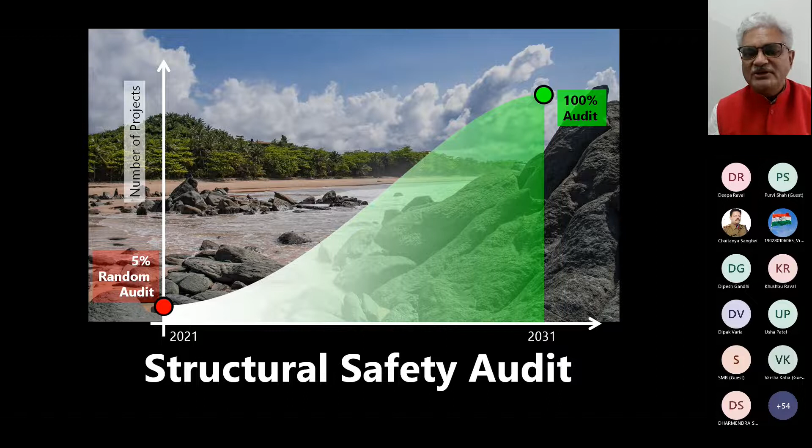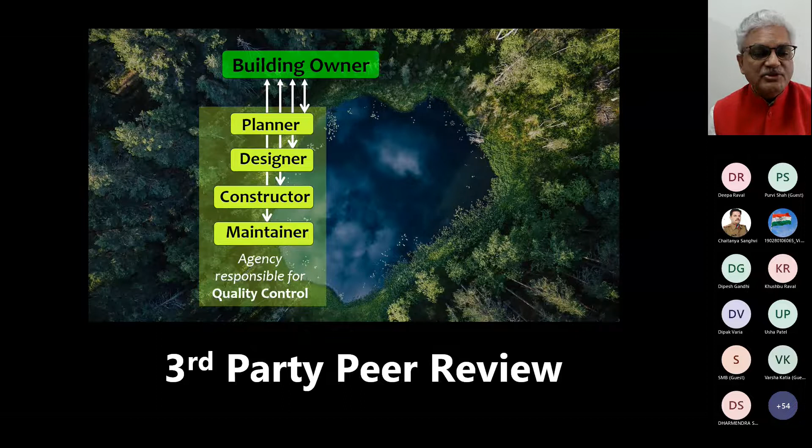...peer review. I have the building owner, which is the first party. And then I have the planner, designer, constructor, which is the second party. And this second party is supposed to do quality control. And then we have a third party, which is a peer reviewer of all the activities, a separate peer reviewer for each activity, and they are supposed to do quality assurance.

So this is how we see that the peer reviewers are answerable to the building owner directly and not to the quality control people, because they have to give feedback so that the building owner who spends money should be able to control the planner, designer, constructor, and maintainer. This is an independent group and only then it will work. Otherwise it will not work.

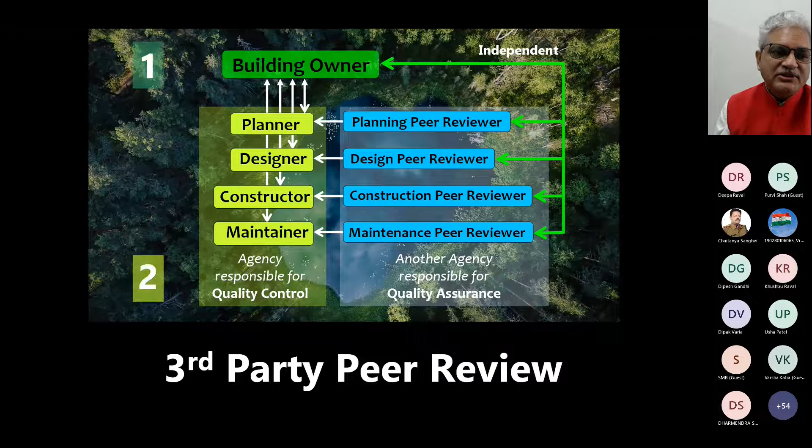So this third party peer review system is not practiced in the country, except in very limited cases. There is a lot of third party peer review happening on paper. But when you look at their quality of services, 21-year-old, 22-year-old boys and girls cannot do quality assurance. They should not do it, and if they are doing it, they should be stopped, because quality assurance should be done by those people who have at least 25 years of service in the subject, who have seen ups and downs, who have seen collapses and have seen good projects.

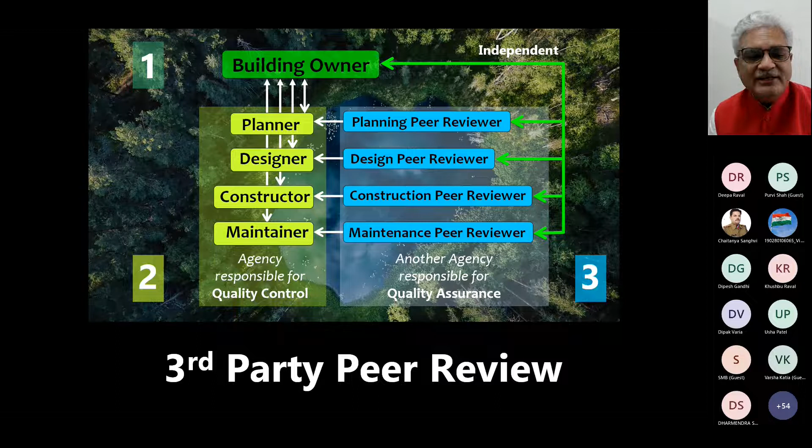Only they can catch the errors in the quality control people's work. If you have quality control people who have 20 years experience and quality assurance people who have 2 years experience, it's the wrong model India is adopting today. We need to stop that urgently.

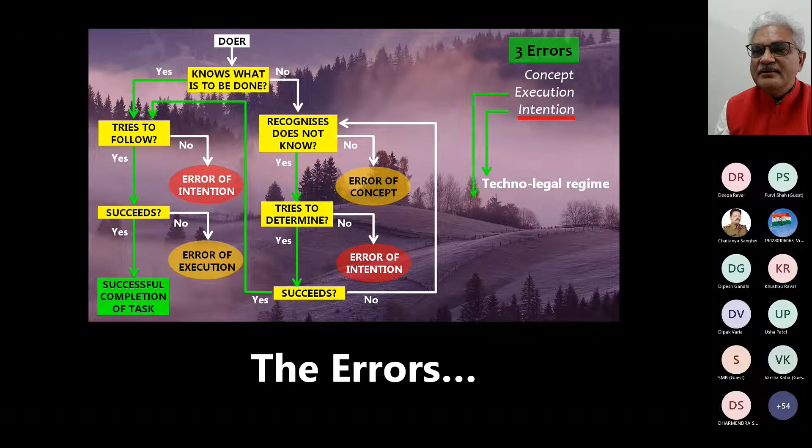In professional practice, we make 3 major mistakes, and those 3 major mistakes are very clearly shown here. Error of intention is one, error of execution is the second, and error of concept is the third. When you look at these errors, how do you correct them? Error of intention is corrected by techno-legal regime, error of execution by licensing of engineers, and error of concept by capacity development. And this is the roadmap that we need.

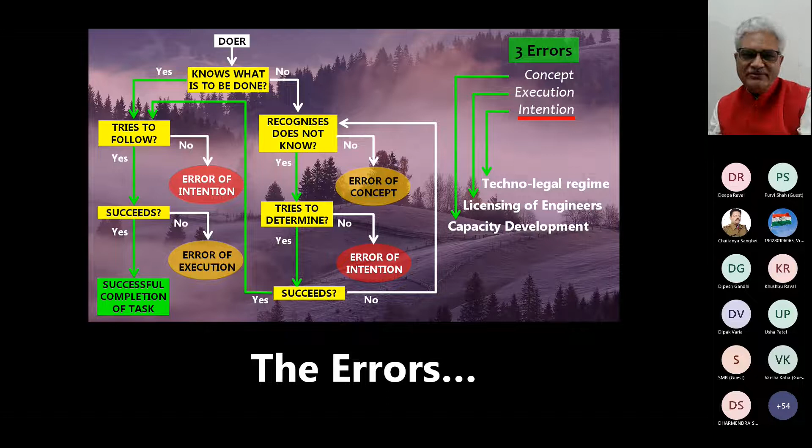Unless you do R&D, you cannot do this capacity development, because we don't know how to build capacity of people to answer the questions. To remove the errors, they need to be investigated, understood, and then corrected, and that is an R&D activity. And that is where we need a huge number of people, right? Complacence has no place in this.

We need to build competence, and competence has 3 components: positive attitude, skill, and knowledge. And attitude is the first one. If you have positive attitude, you learn skills and knowledge over time. If you have negative attitude, you'll never learn anything, and we don't need you for doing structural safety. And I don't think that you can save people's lives in this country unless you love people. You can't save their lives.

So the picture is very clear. You have to ask for competence, and only if you have all the 3, A, S, and K, can you really say that you are competent. If you are going to be a teacher, you better have positive attitude in loads, because you're a people person, right? And if you are a practicing engineer, you should have skill in loads, because you have to implement all available knowledge. And if you're a researcher, you need to have knowledge in loads. And so you will be a better R&D person in life.

The way forward for us is very simple. We have to make an imperfect start. 100 is the enemy of 80, and best is the enemy of good. So we have to start with available resources, men, material, and start doing the work from one corner and slowly nibble the mountain as we go forward.

Earthquake disaster mitigation is a must for India. And unless we do R&D, knowledge sharing, a multidisciplinary approach to problem solving, and partnership between national and international agencies cannot happen. If we have a poor R&D system, we will not be able to interact with international people, because we have nothing to show them that they will be able to discuss with us, right?

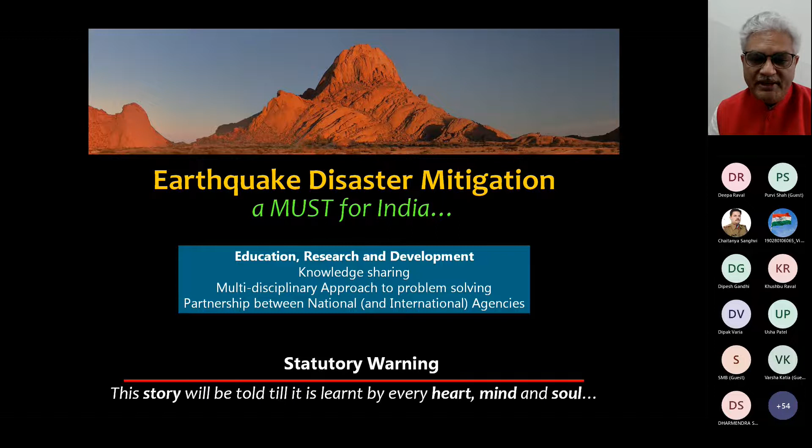So I pray that in time ahead, we will recognize that the 5 elements of nature will continue their wrath on us, and we have to understand from nature how nature is behaving, and we have to conduct ourselves accordingly. Paper tigers are not required for us. You can show anything on computers, but if it is not tested, don't even talk about it. So for that, you need to understand the demand that the earthquake is imposing and the capacity that the structures are being designed for, and only then you'll be able to get the big picture right.

India's growth is imminent, as I said. If we go with today's pace, we'll be 180 crores very soon. And if you are very excited people, we will become 250 crores. And for that many people, we are 140 crores today.

We have to double all our requirements to meet that in 30 years, which is not going to be an easy task for us. Right? It's time to get into action for us. And of course, everything will look tough and difficult. Don't have to worry about destination. Make the path glorious, and eventually destination will be reached. Hard work alone will take you forward, and you need to be sharp in understanding that investing before is safer than paying later. Understand that mitigation is better than response.

And if you look at India, we have the Disaster Management Act in 2005, the Disaster Management Policy in 2009, the plan in 2019, and the earthquake guidelines in 2007, but we haven't gotten started yet, right? And so it's time for us to do a proper earthquake disaster mitigation program with a comprehensive R&D backing given to that. And this is where all of us have to work together and make the country safer in the decade ahead, 2020 to 2030.